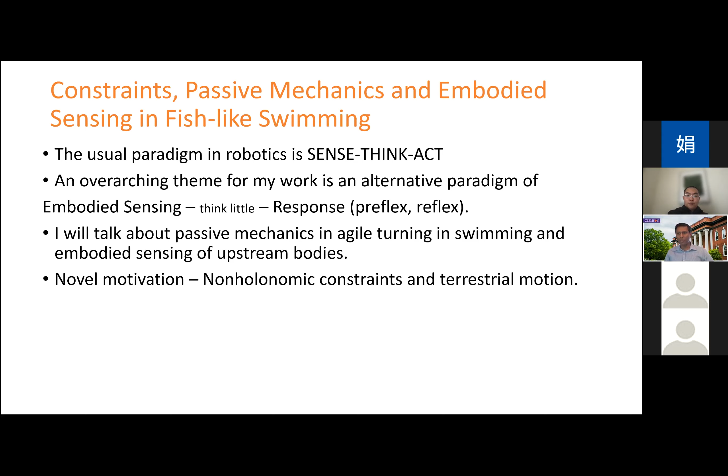These passive dynamic walkers are usually modeled as double or perhaps more inverted pendulums that fall down an inclined plane due to gravity, in such a way that the impact of the feet with the ground produces periodic leg motion. This was once described as brainless and powerless walking. This is not being mean - I think this is more of a compliment, because it conveys the idea that a significant component of leg motion requires little or no power and little or no control or computation.

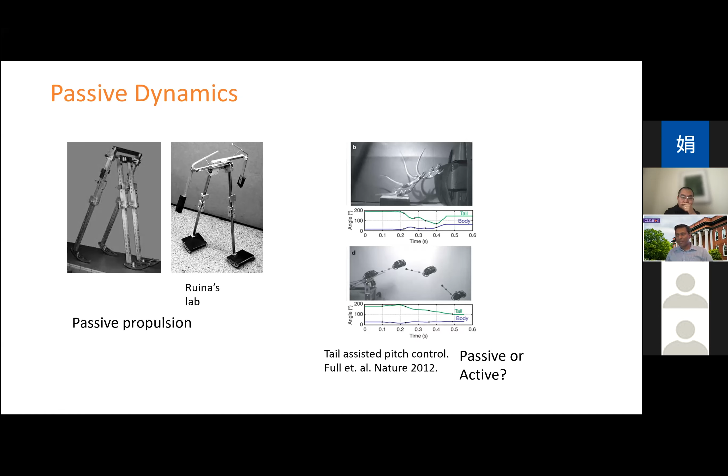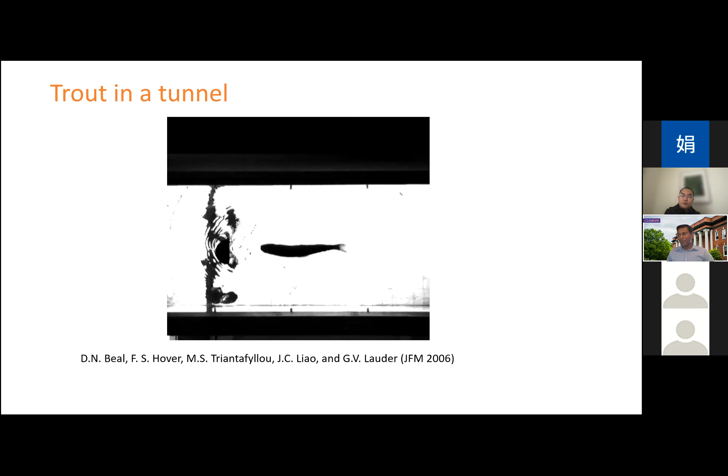In live fish, it's sometimes difficult to tell the difference. I'll quote some papers by Fish and Lauder, and Fish and Triantafyllou in 2006, where they say the amplitude of the dead fish motion is somewhat similar to that of a live fish, though it's uncertain whether this is caused by the fish being alive or dead, or just mass and size differences. In a subsequent review paper, they comment that the extreme bending of fish fins observed in rapid movements makes it difficult to delineate the relative contribution of active versus passive deformations.

Other papers have suggested that passive deformation of the body is initiated in a live fish, and then the animal responds, increasing the rate of deformation once it's initiated. So the computational logic for such swimming animals seems to be: if a deformation is initiated, just increase the deformation, or in other scenarios, act against the deformation. The motion of the body itself is initially a sensor, and then the body itself becomes an actuator.

So we decided that the idea of passive deformation, or change in shape of a swimmer, can help its motion, and we wanted to test this idea. We first wanted to choose a swimmer that can propel itself without any changes in its shape—a bio-inspired swimmer that can swim without active tails or fins. It can still possess tails and fins, but they should not be actuated, so any deformations of those appendages are purely passive, to test what the role of passive deformations is.

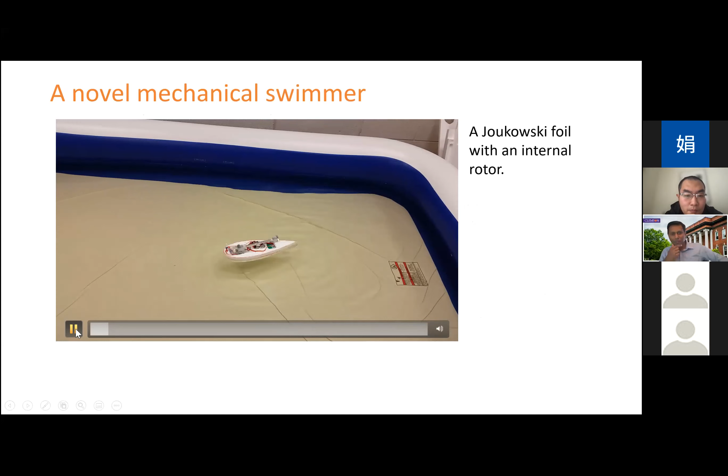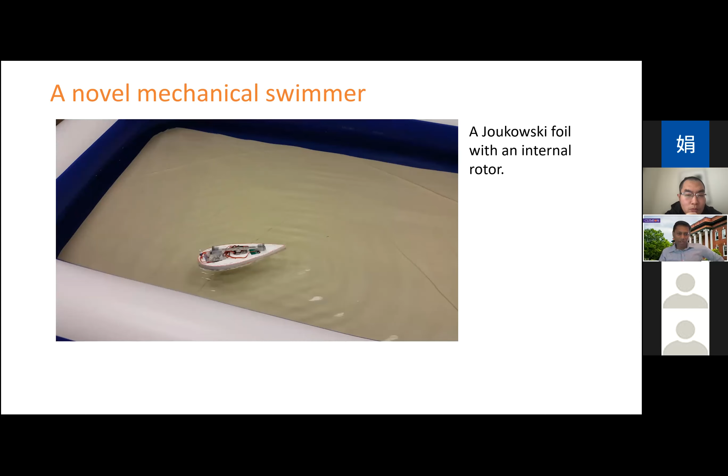That sets the stage for what I'm going to describe, but I'll start with a very simple, primitive experimental video that I always like showing. What you see is a foil with a rotor on top of it. That rotor is not in contact with the water. Its periodic motion, going back and forth sinusoidally, produces propulsive motion. Different frequencies and amplitudes of the rotor's motion can produce different types of motion. I like this video because it's an old setup we made 7-8 years ago, and it's interesting because it showed theoretical ideas in action.

I want to talk a bit about the motivation for this, and how this is now a swimmer without any active tails or fins.

This particular model of the swimmer was inspired by a well-known non-holonomic system called the Chaplygin sleigh. I'll now take a short detour to describe the non-holonomic mechanics of the system and how it has played a role in our understanding of these swimming mechanics.

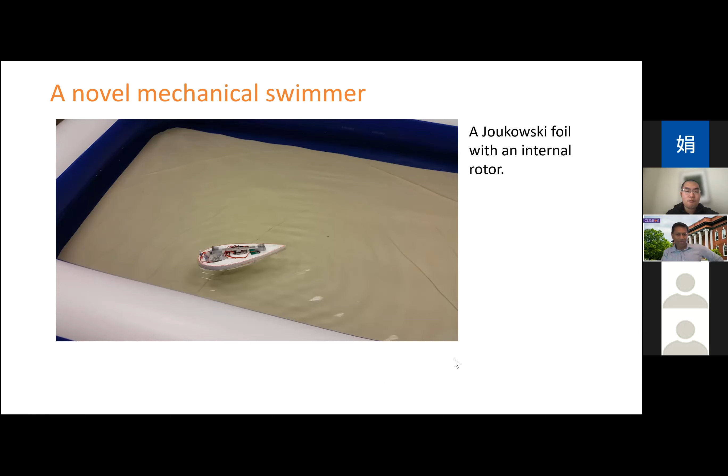The Chaplygin sleigh is a cart-like system, shown in the left figure. It's a sledge or sleigh with a sharp knife edge, similar to a skate with a sharp knife edge. Here I've conceptualized it by eliminating the knife edge and using a wheel at the rear end of the system, with casters that allow omnidirectional motion at the front. This is a well-known system going back to 1908 in the works of Sergei Chaplygin.

I'll quickly describe what I mean by non-holonomic constraints here. The configuration manifold for the system is SE2, parameterized by the coordinates x, y, and theta - the center of mass x and y and its orientation angle theta. It's got generalized velocities x dot, y dot, and theta dot.

Now we impose a non-holonomic constraint at the rear wheel. That constraint is the equation: minus x dot sine theta plus y dot cos theta minus a theta dot equals 0. What that constraint means is that lateral motion at that wheel is not allowed, but longitudinal motion is allowed.

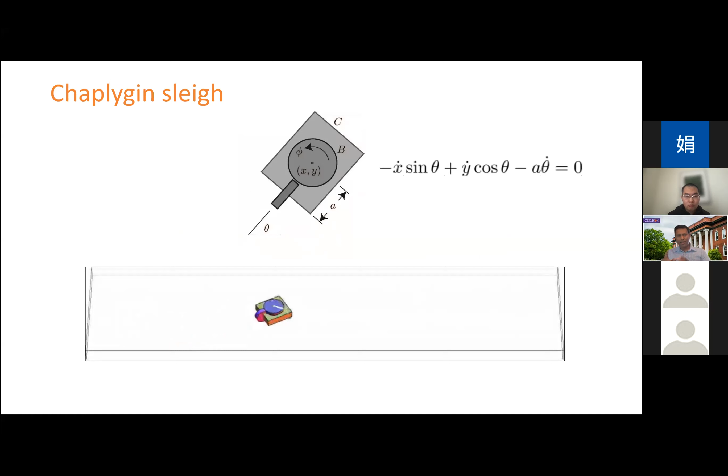So we want to produce such turning motion on the sleigh. To do that, we imagine placing a balanced rotor on top of the system and actuating it periodically. Here is a simulation of the balanced rotor going back and forth periodically, and when we do that, the Chaplygin sleigh moves forward.

This is entirely a result of the constraint. If the non-holonomic constraint was absent, the entire system would just spin back and forth in place and would not have any net displacement in one cycle of the rotor's motion.

Here the example is somewhat artificial - there is no dissipative effect. So as the rotor spins back and forth sinusoidally, the sleigh gains speed, its speed becomes unbounded, and it goes very fast. Later on, in the same problem, we'll introduce some dissipative effects to bound its speed.

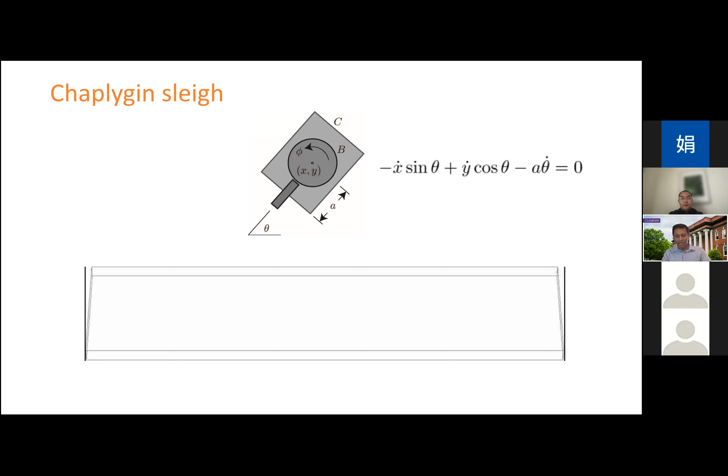We've already seen a physical resemblance between this system and the case of our swimmer, but the resemblance is more than just physical. There is, in fact, a nice mathematical similarity between the motion of these two bodies. So I'll now consider a very simplified model of swimming, where I'll analyze the Kutta-Joukowski condition for the shedding of vorticity past an airfoil, or past this hydrofoil in this case.

So W1, W2, and W3 are the Kirchhoff potentials, Vx, Vy, and omega are the velocities of the body in its own body frame. And the WV are the potentials induced because of each of the point vortices.

Running through some calculations, putting in numbers for the parameters of the Joukowski foil, we end up with an equation equivalent to the Kutta condition: minus 2x-dot sine theta, 2y-dot cosine theta, and k theta-dot, equals minus uv, which is the velocity generated at the trailing edge because of all the point vortices.

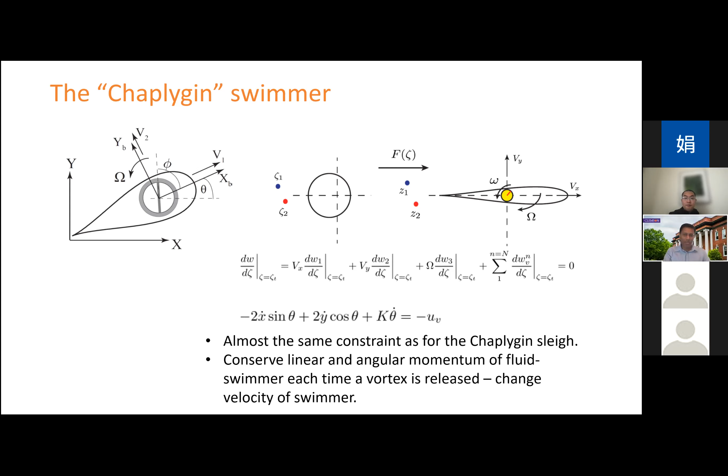Here is a simulation of such a swimmer in an inviscid flow. All these point vortices are inviscid point vortices. There is a yellow rotor placed inside this foil that's executing a sinusoidal motion, and it propels itself forward.

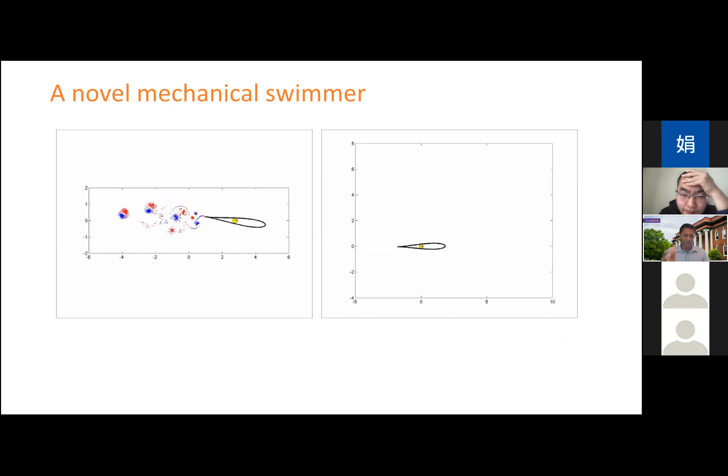Now if the rotor, instead of executing this back-and-forth sinusoidal motion, spins mostly in one direction, you can get a net change in the orientation or the heading angle of the swimmer. Overall, this becomes an underactuated system where the motion of the rotor can propel the foil forward, and different motion of the rotor can steer the foil in different directions.

This is somewhat enabled by the existence of this non-holonomic constraint. As I said, non-holonomic constraints enable underactuated systems to access the whole configuration manifold, basically.

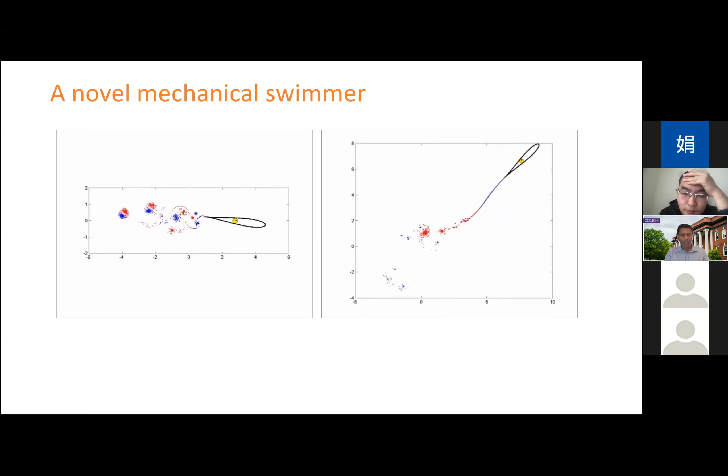But as I said, for a real swimmer there is dissipation, so we cannot just go with the inviscid flow simulations. So first, again, I'll go back to the Chaplygin sleigh. I'll introduce dissipation into the system, introduce viscous damping, and then apply periodic actuation on the sleigh.

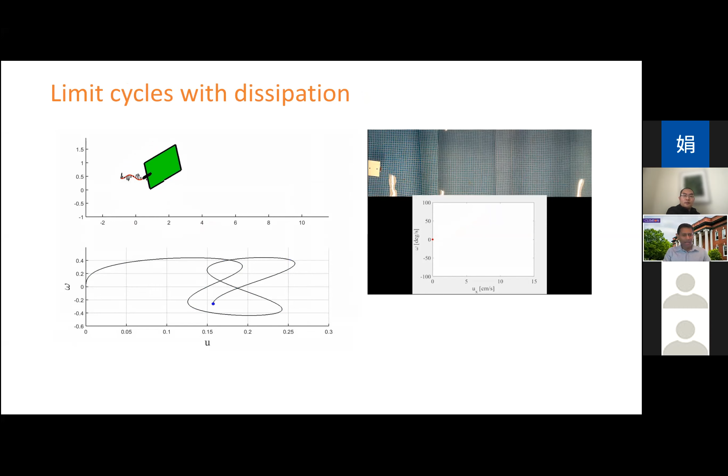When we do that, the velocity of the sleigh is no longer unbounded. At the top is a simulation of a sleigh moving forward along a serpentine path. In the bottom panel, you see a figure of the longitudinal velocity u and the angular velocity of the sleigh. These velocities converge to this figure-8 shaped limit cycle.

Given an amplitude and frequency of actuation, there is such a figure-8 limit cycle for the Chaplygin sleigh.

Now in exact analogy for our swimmer, here I'm showing an experimental video of the swimmer, where we measure its velocity and its angular velocity, and we are plotting those variables. What we see is the emergence of this figure-8 limit cycle.

Just to clarify, what you see is a swimmer with a board stuck on top of it. The board is not in contact with the water. We are tracking that board with the two black circles on it, to measure its orientation, the rate of change of its heading angle, and the velocity u.

So once again, even for a realistic system with realistic damping, there is a nice similarity between this non-holonomic system and the case of a swimmer. That similarity is now at the level of the existence of these limit cycles. Given a periodic input, given a periodic actuation, there is a limit cycle for both of them.

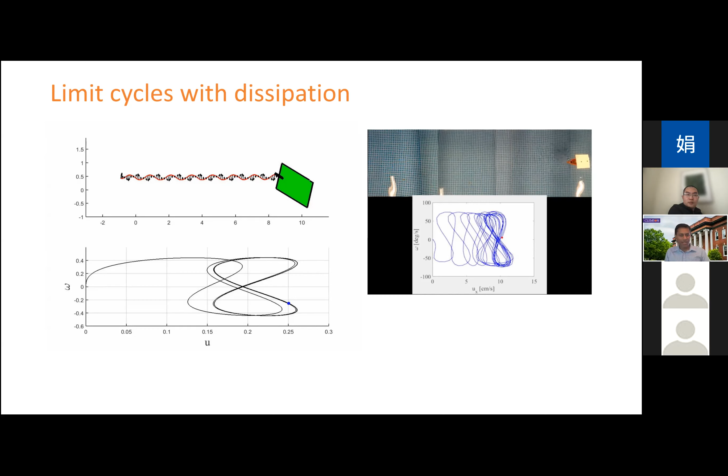Of course, the existence of these limit cycles in a qualitative sense is nice, but insufficient on its own. So we pose some inverse problems, where given a Chaplygin sleigh, what is the equivalent Joukowski foil with an equivalent actuation that produces the same limit cycle?

What are the shape, mass, and inertia parameters of this foil that will produce a limit cycle similar to that of the Chaplygin sleigh, or vice versa? Given a swimming foil with certain shape or inertia parameters, what parameters of the Chaplygin sleigh—what inertia, mass, and damping coefficients—will produce similar limit cycles?

This question is interesting because we can do calculations with the Chaplygin sleigh. My intention is not to go into the details of these calculations, just a quick overview of the kind of calculations we can do.

We can do a harmonic balance calculation for the approximation of limit cycles. We can match coefficients by comparing the different frequency components, and find an expression or equation for that limit cycle.

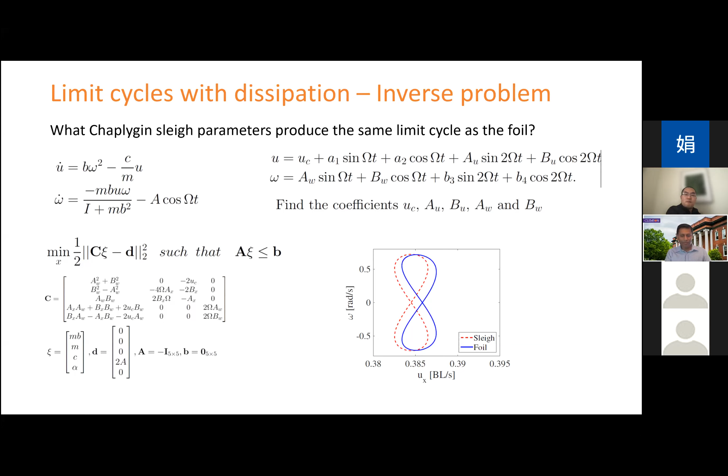So what works for the Chaplygin sleigh works for the swimming foil as well.

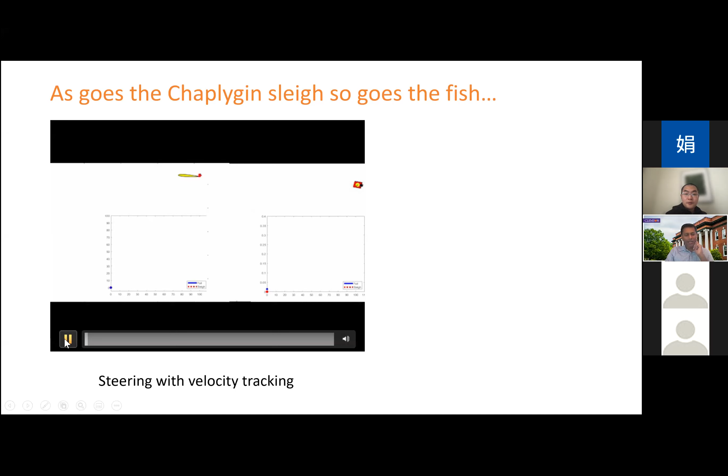On the right, I'm showing the longitudinal velocity of the sleigh and the foil. For the sleigh it is the red dashed line; the blue line is for the foil.

On the figure on the left, we're showing the heading angle. We wanted to move along a horizontal straight line, then make a quick transition to a vertical straight line, while always tracking the desired speed, which we can vary. Basically, we're tracking limit cycles in velocity space and tracking a path in physical space, giving us velocity tracking along with simultaneous path tracking.

Here I've only shown the steering problem—there's quite a bit more we can do with the similarity between these two systems. Maybe I'll be back next year talking about reinforcement learning, where we control a sleigh and apply a similar algorithm as a starting point for path tracking or path planning of a swimmer in experiments.

For now, I'll stop with this analogy and move on to the role of passive dynamics and the turning motion of the swimmer. Here the turning motion occurred with a significant turning radius, and we want to see what role passive dynamics plays in enabling faster turns.

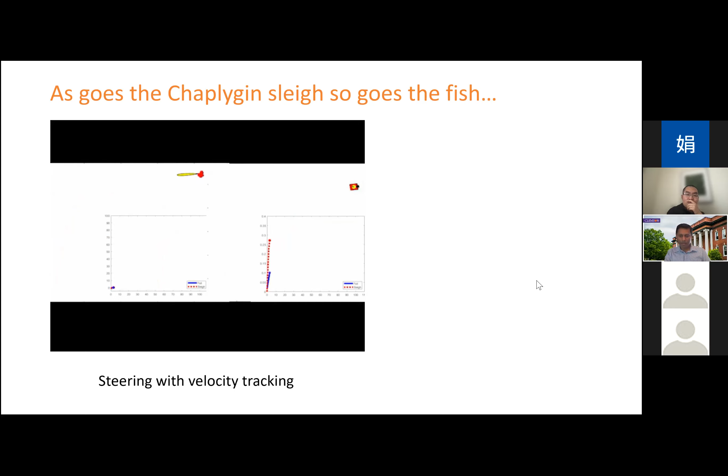I'll go back to an experimental video, because what we saw before was just simulations. So here is an experiment where the foil tries to make a turn. Initially it gains some speed, and then it tries to make a turn of about 90 degrees. The turn is produced by spinning the rotor very quickly in one direction without the back and forth motion.

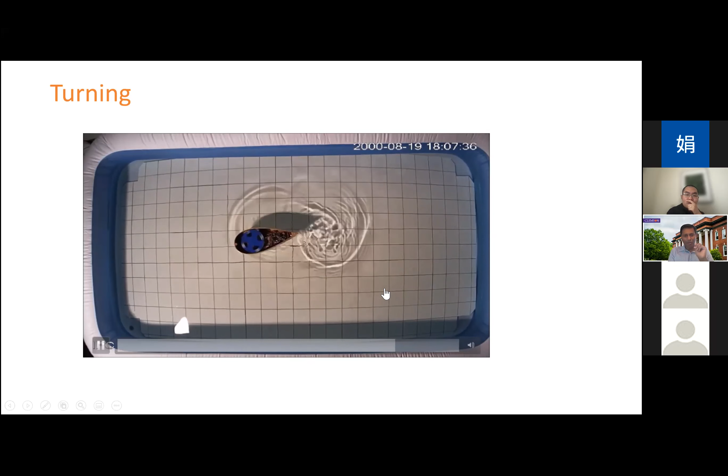The lighting in this is not very good, but that was somewhat intentional. What we were trying to do is capture the shadows of those nearly discrete vortex structures. You can see some shadows in the water or on the floor of the pool. These are actually the centers of the vorticity being shed. They have a fairly discrete structure, at least for some short time scales before they diffuse away.

So the swimmer's ability to make quick turns is actually not that great. It is able to turn, but it takes some time to make these turns.

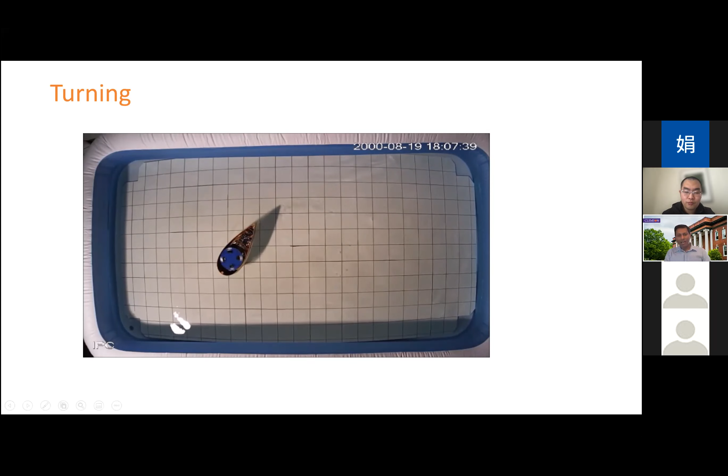Without getting into too much detail, this is partly inspired by the turning motion of a Chaplygin sleigh with a passive tail. We impose a constraint on the tail but no constraint on the main body. We'll see that the turning motion of the Chaplygin sleigh is increased if the line joining the center of mass of the sleigh with the constraint point doesn't align with the longitudinal allowable velocity direction.

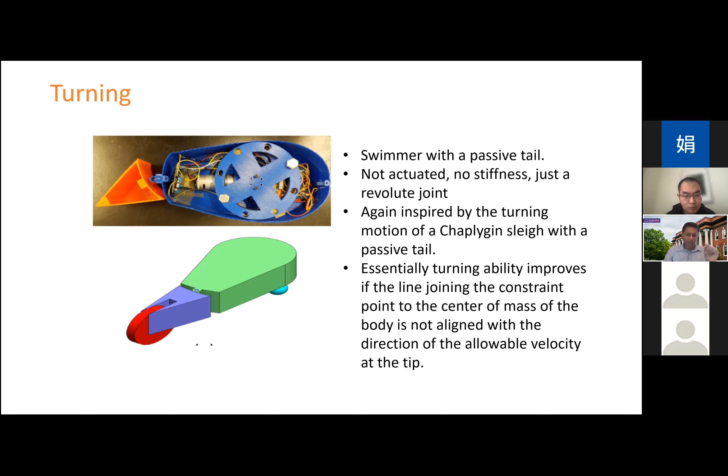Roughly, what happens is that with different periodic inputs, the sleigh's velocity gets pushed away from the limit cycle, and that limit cycle becomes unstable. So the sleigh's velocity doesn't easily return to the limit cycle because it is now unstable. A disturbance then changes the stable configuration of the sleigh, makes the tail turn, and that turning motion of the tail produces a very quick turn of the overall body — which is what we're going to see with the actual swimmer as well.

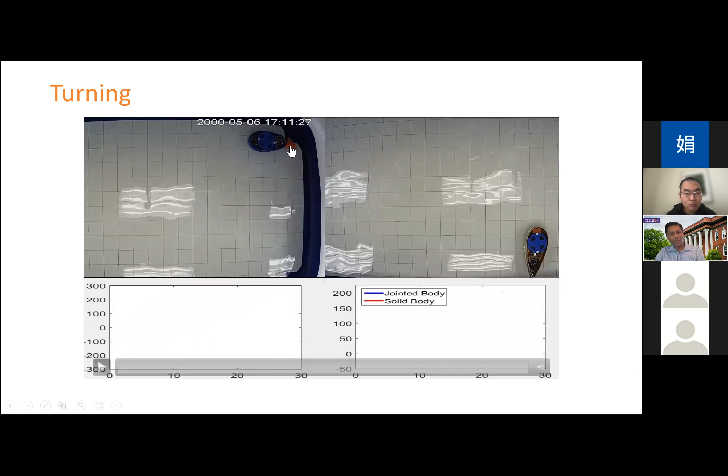So here are two videos of two foils. One has this passive tail, shown in orange in the left panel, and the other, in the right panel, is the swimming foil — just a rigid body without any passive tail. We'll apply the exact same control inputs, meaning the same rotor velocities on both, and see how well each of them can turn.

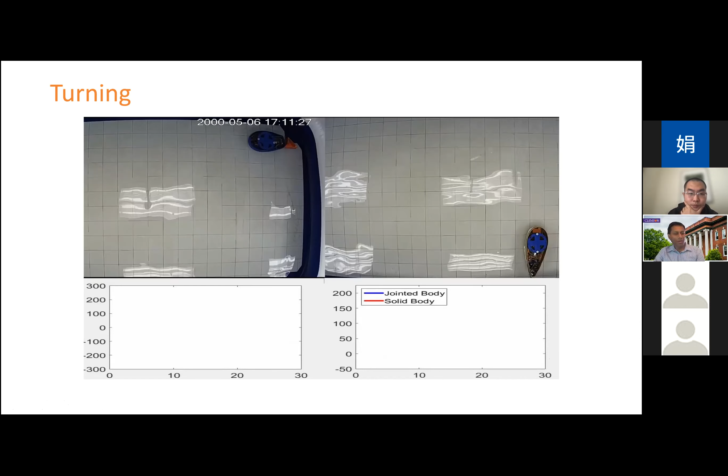On the left we're showing a sinusoidal control input to give the foil some initial velocity, and on the right we're seeing the heading angle of the two foils. When the rotor spins in the same direction at a continuous rate, the body with the passive tail makes a larger and larger turn — the total change in heading angle is greater for the foil with the passive tail.

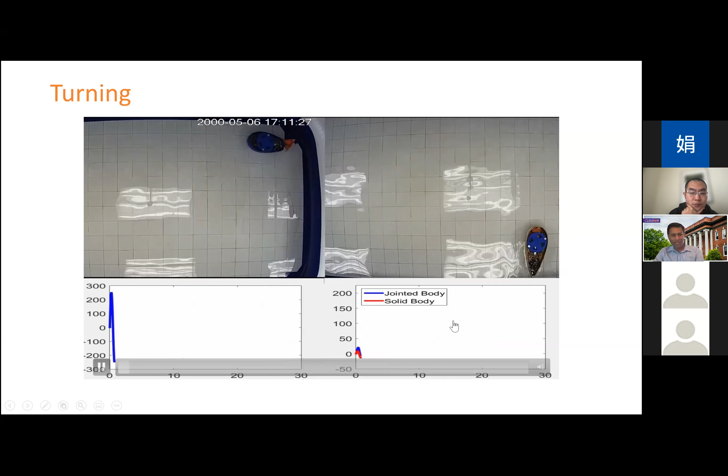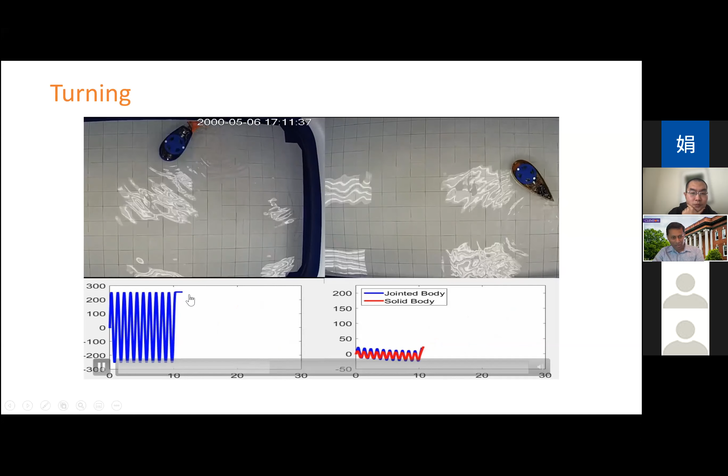I'll just play this again. The control inputs in both cases are exactly the same — that's the control input being shown here. Now the rotor turns constantly at a constant rate, and the angle that the body with the passive tail turns is more than the angle the body without the passive tail turns. This keeps repeating as the same motion is executed again and again.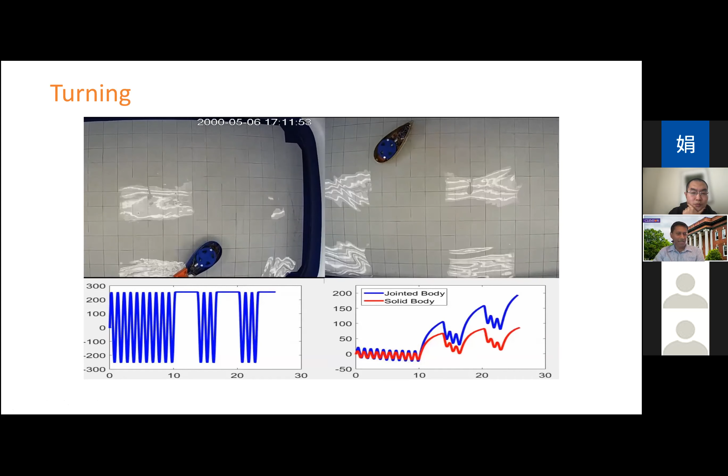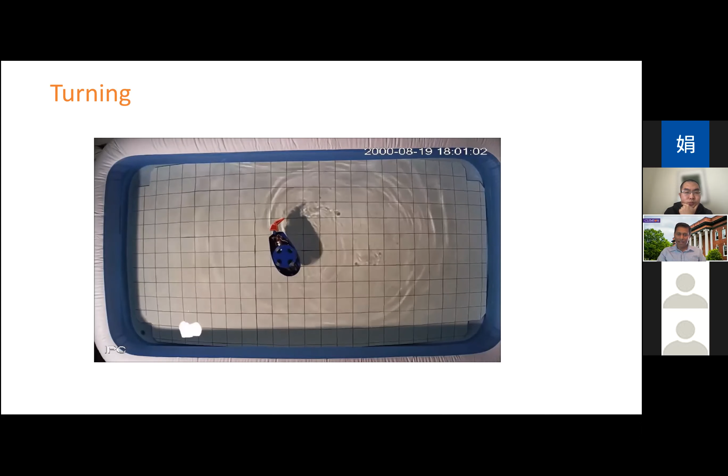We want to see if we can get further gains in turning ability by adding more passive tails. In the previous example, the rotation of the passive tail was constrained — once it reached a certain turn angle, the tail segment collided with the main body and couldn't turn further. Here we allow a greater range of motion, and we actually have two segments for the passive tail. Now making the rotor turn in one direction enables a faster turn, with a smaller radius of turning as well.

And that's the movie that shows that. So here is a side-by-side comparison of different foils with different types of passive tails. Our intention here was only to test what the role of the range of motion of the passive tails was, not really a test of the different geometries of the passive tails themselves.

Essentially, what we observe is that a body without a passive tail—in all cases the actuation is exactly the same, the same amount of torque is applied in all four cases—takes a fairly large amount of time to make about a 90-degree turn. The first 60 or 70 degrees is fast, but after that the angular velocity slowly decays, and the foil doesn't turn all that much. So the first 60 or 70 degrees for the rigid body can be achieved in about 2 or 3 seconds, but thereafter the turning motion slows down.

On the other hand, in the extreme case where we have passive tails that can have a high degree of rotation—enabled by the existence of the second segment, which can turn quite a bit—we can get the robot to turn about 90 to 100 degrees in less than a second, and about a full 180 degrees in 3 to 4 seconds. The radius of turning is also just about half a body length or less for a 180-degree turn, which is quite an improvement compared to the case of just the rigid body.

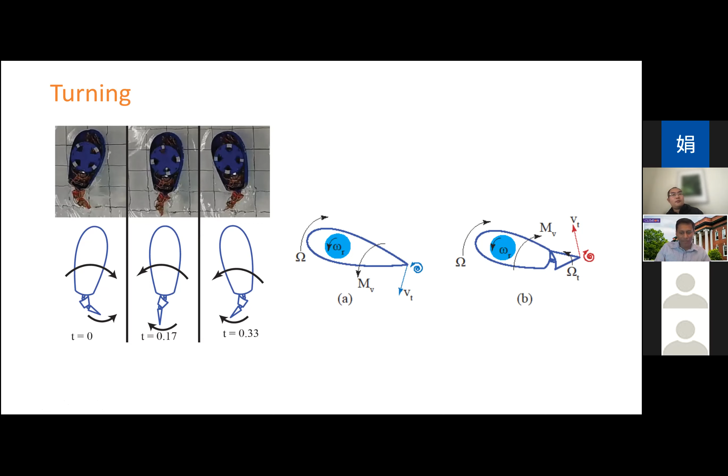So this is just a rough calculation or a rough explanation, a back of the envelope sort of calculation. And we verified that with some computations, using the panel method. So here is a quick description of the sort of computation that we did.

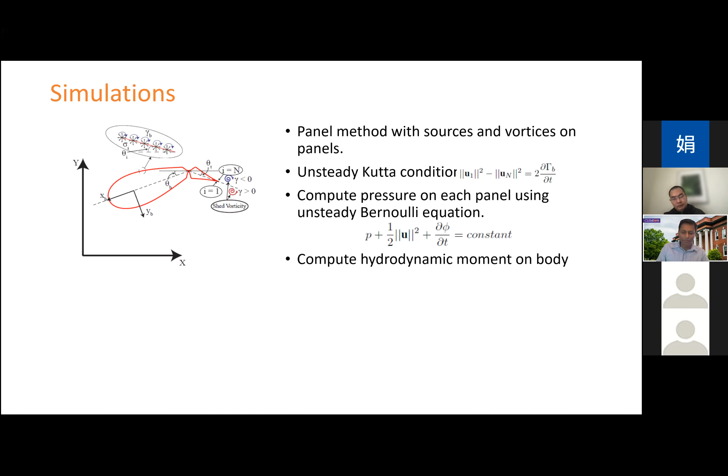And doing that, here is a simulation of two foils. I'll just stop the simulation. The foil on the top, the tail is rigid. So even though it shows the body with the tail, it's rigidly locked. We impose a locking condition so that it acts like one rigid body.

While for the foil on the bottom, the tail is allowed to move. We are applying once again the same periodic input in a free stream velocity, which are all the same for both of them. There are two different simulations, I'm just showing side by side, so there's no hydrodynamic interaction between the two bodies.

I will zoom in close to the trailing edge into this movie and then point out that the sign of the vorticity that is created at the tail is different. The tail, in fact, has a different phase in its motion compared to the trailing edge for the rigid one.

So roughly summarizing different snapshots of the simulation on the right, there are phases within the motion of these two bodies where the sign of the vorticity that is created at the trailing edge is the same for both bodies. That would be figure B, or the second row of the figures in both of these panels, as well as the last row of the figures in both of these panels.

But there is also a certain phase of the motion where the sign of the vorticity is different. That would be the top row and the third row, where you can see just by the color difference in the vorticity that the vortex sign is different.

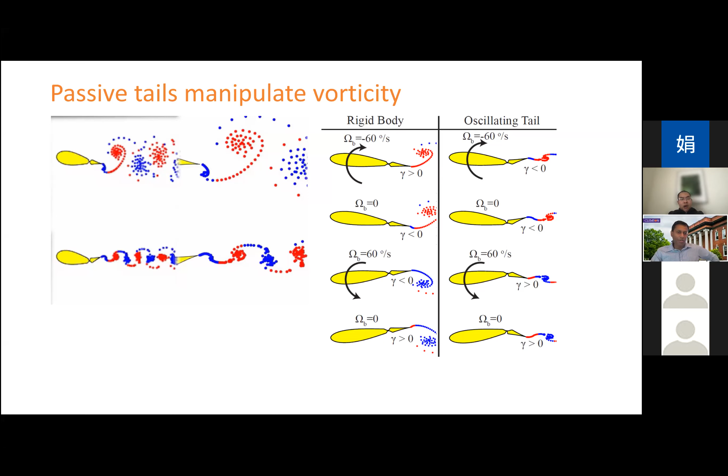And all of this is enabled just by the existence of that passive tail. We're not doing anything different in terms of the actuation for both bodies. The tail is not any smart tail, there is no other further control input on the tail.

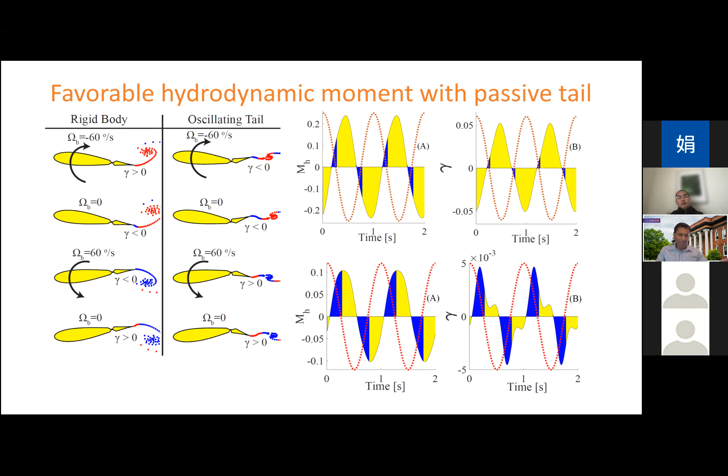It's well known in several papers going back to the 1970s or 80s that blind fish can school, but fish without lateral lines cannot, or blind fish without lateral lines cannot. So that's indicative that the lateral line helps a fish build a non-visual picture of its surroundings, helping it detect predators, prey, obstacles, and so on.

We want to see - I'll say a little bit more. Less well known is that some fish also use fins as mechanosensors. Fins are proprioceptive; the rate of bending of fins encodes information. We want to see if such proprioception can be used to detect predators or prey, or in general obstacles, or something about the upstream flow.

The difference here is that lateral lines are specialized sensors, but proprioceptive sensing, in the case of a robot, only requires that we measure kinematics - accelerations and velocities of the swimmer itself, or of appendages like tails or fins on a swimmer, which is much easier and much cheaper.

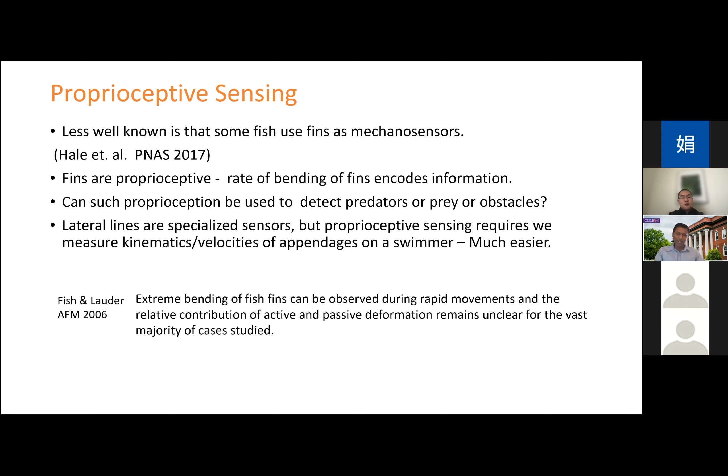We'll use a similar setup to explore this ability of a swimmer to use proprioceptive sensing to identify what is in front of it or what is upstream. I'll call this a blind fish in a water tunnel experiment.

What we have are two hydrofoils, two Joukowsky foils. The trailing foil shown is a passive foil. It is tethered by a very short wire to this rod here, and its motion is entirely determined by the motion of the water in the water tunnel. Upstream is another foil.

We've once again placed these boards on top of these foils. These boards are not submerged in the water - they're there just to enable us to track the motion of these bodies. Upstream, we have one more foil, which is forced to oscillate sinusoidally.

Here is a schematic picture. The upstream foil is oscillating periodically. There is a free stream velocity u-infinity, and the downstream foil is going to respond - its motion is entirely determined by the free stream velocity as well as the oscillations of the upstream body. In this picture, we've captured a shadow of the vortex wake that's being created.

We want to see how the vortex wake influences the motion of this body, and if the motion of the trailing body can be used as sensory information to identify the upstream dynamics. We're going to do this identification problem in terms of the Strouhal number of the flow.

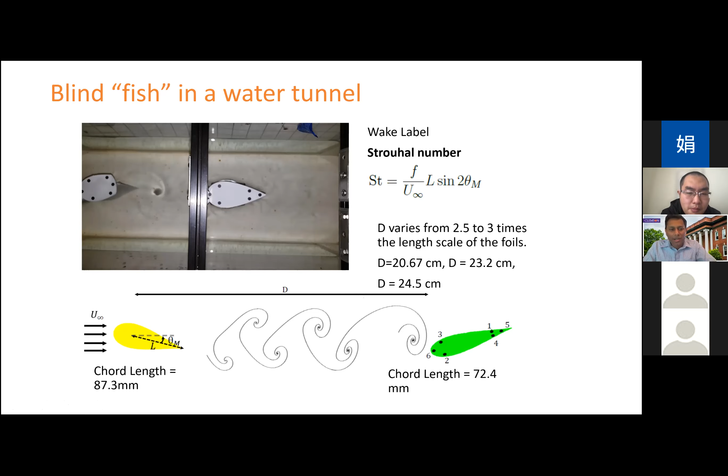Here is a video of such an experiment. The upstream foil is being actuated periodically, and the downstream foil just responds to the motion of the water around it. The dye shows the creation of the vortex wake that the downstream foil is experiencing. We've done these experiments with different forcing amplitudes, different forcing frequencies, and different free stream velocities, and put them together in wake classes.

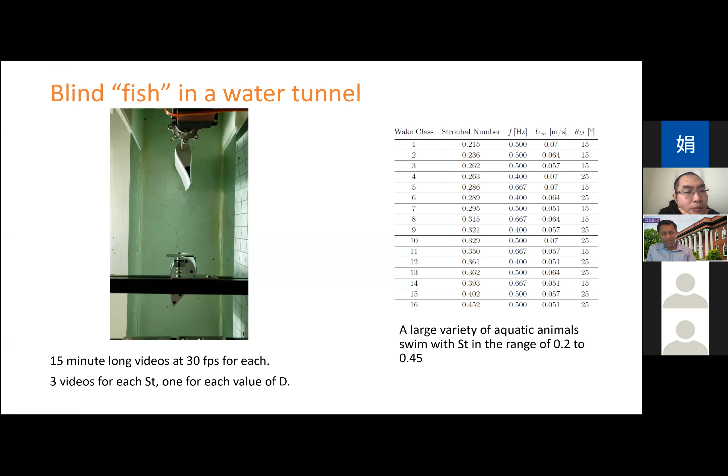We assign these class labels by the Strouhal number. In our experiments, the Strouhal number ranges from about 0.21 to about 0.45, which is the range in which many aquatic animals swim. We do these experiments and collect these videos, which are usually about 15 minutes long. Before I further explain the processing steps, I want to emphasize that the vortex wake can be fairly complicated.

We considered cases where the amplitude of oscillations of the upstream foil is large, as well as cases where the free stream velocity is small. What that does is create a vortex wake that we imagine as anchored by point vortices, but the wake is both advected and diffusing. It diffuses sufficiently before reaching the downstream foil such that it collides with the walls of the water tunnel.

So in some of these experiments, there is significant interference in the vortex wake from the boundaries of the water tunnel, while in others that interference is smaller and the wake doesn't diffuse sufficiently. In that case, what the downstream foil experiences is mostly the effects of just the upstream foil, without the boundary changing the vortex wake. We considered both classes in our experiments to capture vortex wakes that could be more realistic or emulative of wakes experienced in a realistic environment.

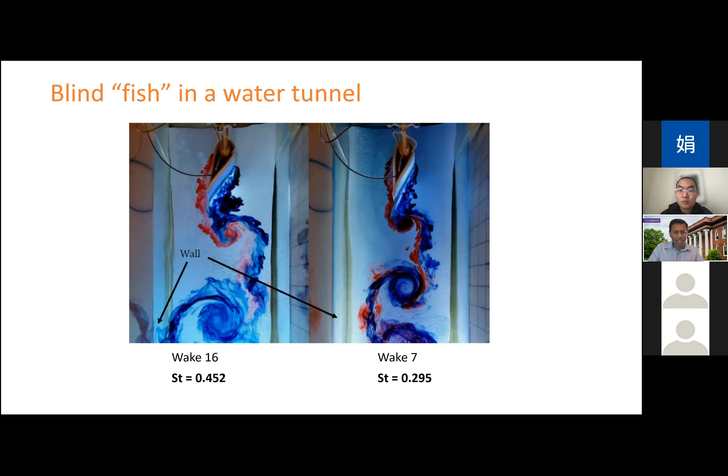So what we do is plot the angular velocity of the leading foil and the angular velocity of the trailing foil.

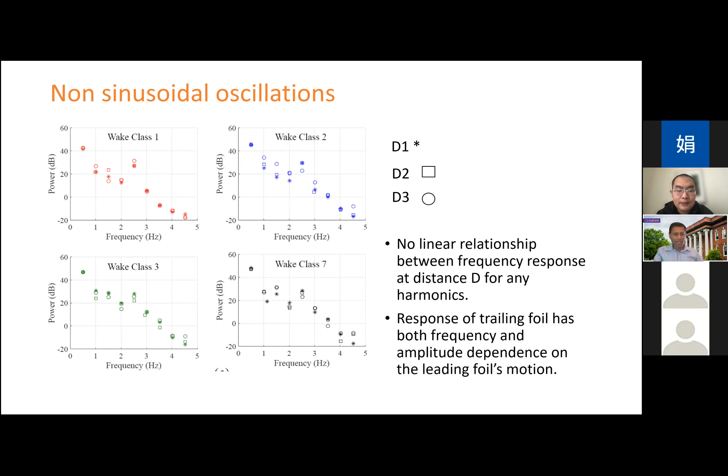I just want to show that we can't easily do this identification problem just by looking at the frequency components in the velocity of the trailing foil. Doing the Fourier transform and a power spectrum for the angular velocity of the trailing foil shows that there aren't necessarily obvious patterns we can use to say that if the trailing foil has a certain frequency, the upstream foil must be doing a corresponding Strouhal number calculation. In the interest of time, I'll skip this analysis showing why straightforward harmonics are not very useful.

What we do is take the angular velocity of the trailing foil and cut it into different snapshots, each snapshot being 1 second up to 4 seconds in length - we've tried different things. We rescale those angular velocity signals to eliminate the effect of the distance between the two foils, as shown by this equation, normalizing what the angular velocity of the trailing foil is.

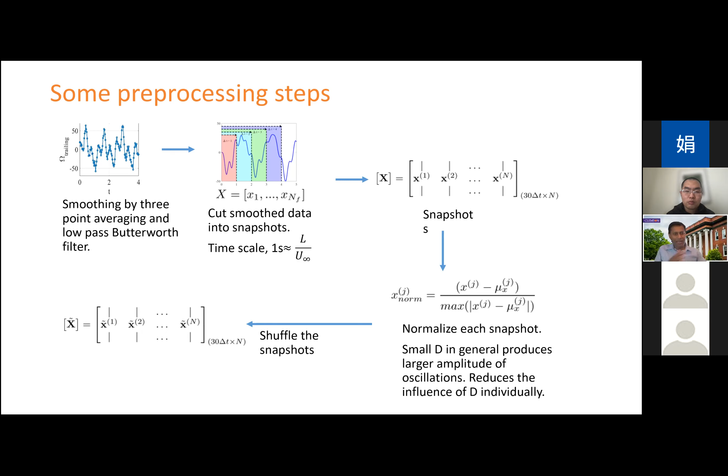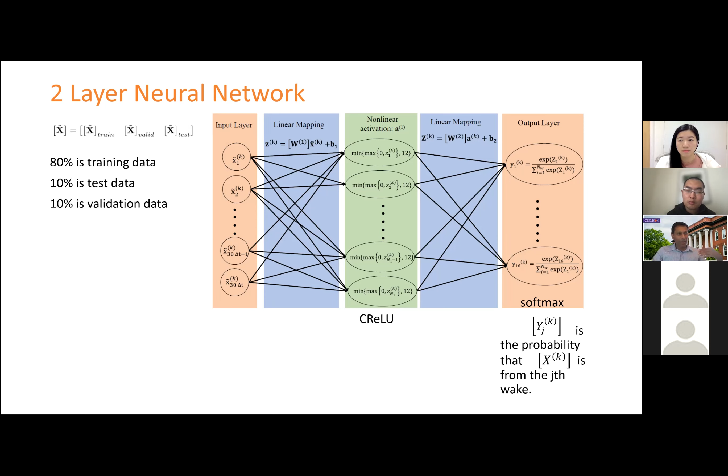We shuffle the snapshots and feed them to a neural network classifier. This is a fairly shallow network - I'll skip the details here. We have about 80% of the data as training data, 10% validation, and 10% test data. The output of the network is a probability vector with 16 components, each being the probability that the wake the trailing foil is experiencing belongs to one of those 16 classes.

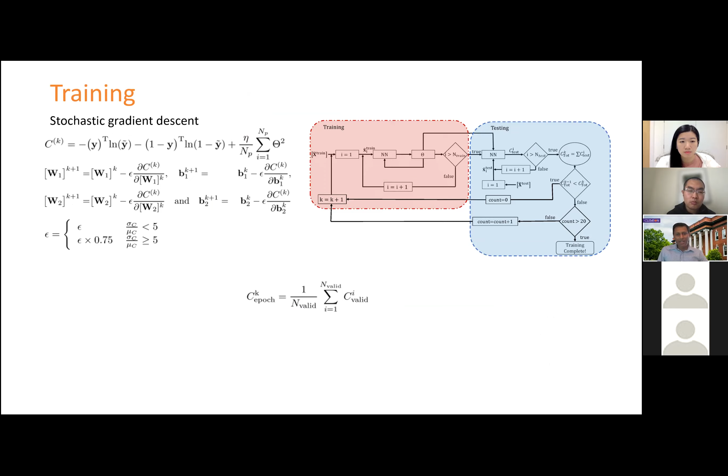The training for the neural network is through stochastic gradient descent, and we use early stopping to prevent overtraining. We've trained several different networks, varying parameters like the number of layers, the number of nodes in each layer, and so on, and then identified what we thought of as the best network. I'm only going to describe the results corresponding to the good networks, or one of the better networks.

For example, vortex wake 16 is poorly classified by the downstream foil, with a classification accuracy of about 0.73. Wake 16 is one of those wakes where there are significant wall effects in the vortex wake that the trailing foil experiences - the vortex wake diffuses sufficiently, collides with the walls, and the wall effects become embedded into the information the trailing foil experiences. Where such effects are small or non-existent, the classification accuracy is extremely high.

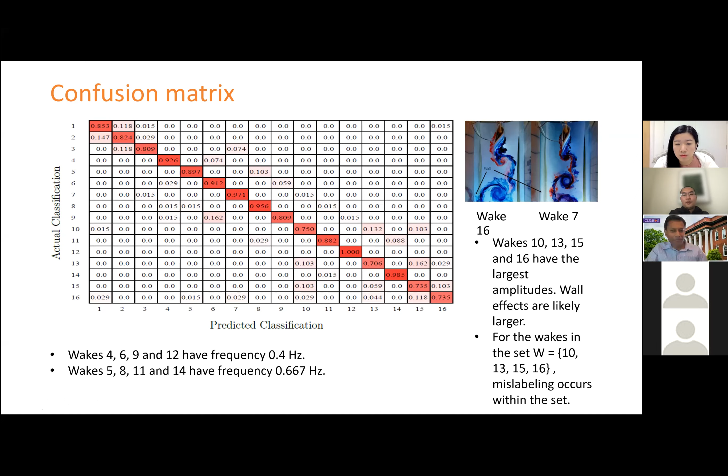When the length of the snapshot is 1 second, that means we're using about just 1 second of information. The fish needs to use only 1 second of information and then decide what is upstream in front of it. Versus when delta t is equal to 4, the fish can use 4 seconds of information.

And then decide what is upstream of it. So the classification accuracy for these 1 second snapshots is actually not that good. It's about 60 to 70% in the best case scenario. But the classification accuracy takes a big jump the moment we use snapshots that are about 2 or 3 seconds long.

In terms of body lengths that a swimmer would travel, using the free stream velocity as a scaling factor, a 2 or 3 second snapshot would correspond to about 2 to 3 body lengths. So as the swimmer is traveling, if it travels about 2 to 3 body lengths and uses the angular velocity of, say, its tail for that period of time, it can classify what is upstream of it quite well.

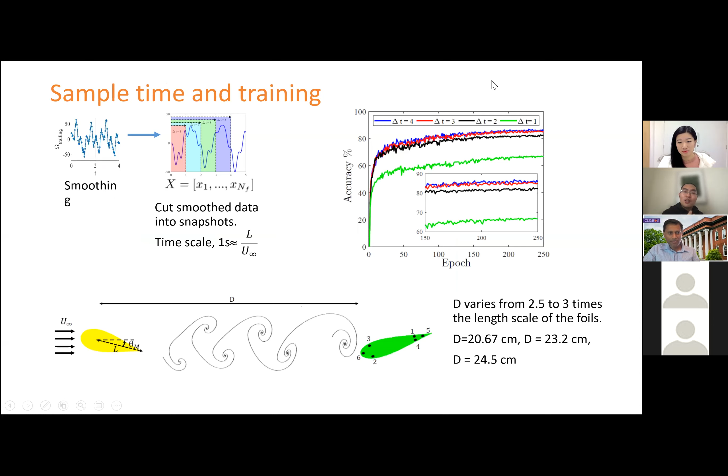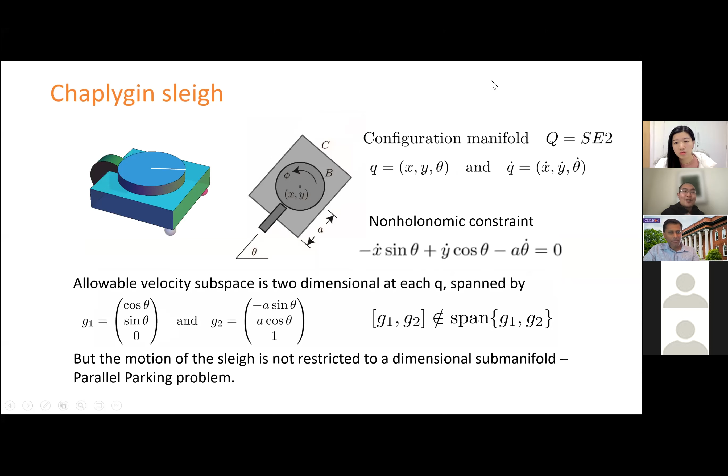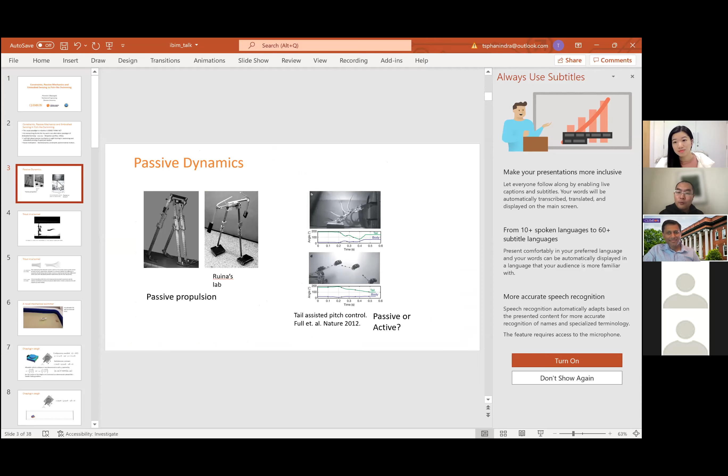Going back to the first slide of your motivation, the passive walker—from my perspective there's 3 key components to that. One is the initial condition, they need an initial push slightly. Then there's also this slope, which is the gravitational effect. And the third is the magical part, from my perspective—I heard they actually tune very carefully the suction cup of the knee, so that this knee cap's kinematic dynamics really determine whether you can start walking or just fall off.

So with that being said, for like a knee suction cup, what they change is to some degree the stiffness and the damping. So in your case, the tail, are you planning to explore, or have you already explored, the tail having a little bit different stiffness? In nature, for tuna fish, there's a new publication in Science Robotics showing the tail can change stiffness a little bit, so it can work optimally in different swimming regimes. So this is the first question I want to ask.

Yes, we have considered that problem of can we change the tail stiffness and then get different gaits, different types of motion. The gaits here have different efficiency. If the tail oscillates too much, the body surge velocity can be large, but it does a very serpentine path and its net displacement along a line would be small. So in some sense its efficiency drops, and the tail stiffness does determine the efficiency of the motion.

But more importantly, more interestingly, tail stiffness can induce faster turns. If the tail is very stiff, it's essentially a rigid body, and in that case we can get slightly faster swimming speeds with just this experimental platform. If the tail is flexible, the swimming speeds are somewhat smaller. The difference is not that much, but it is there consistently in several experiments. But a flexible tail will enable the body to turn faster.